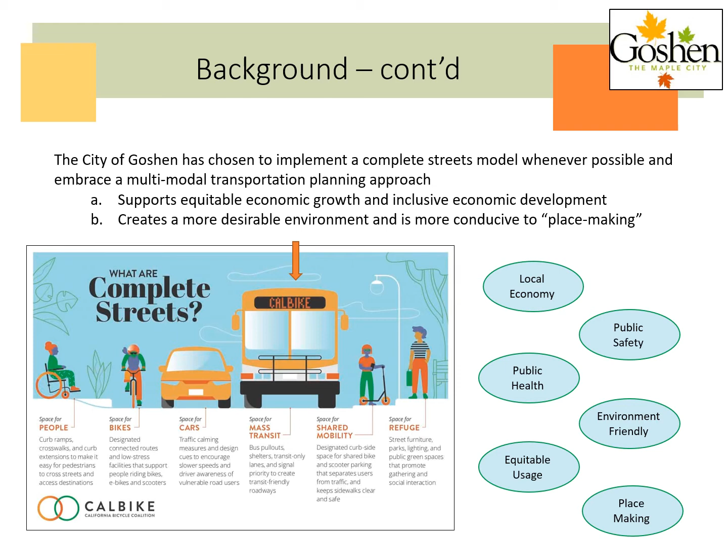A road diet offers a relatively low-cost application with high-value improvements, including enhanced safety, mobility, and access for all road users, and a complete streets environment to accommodate a variety of transportation types.

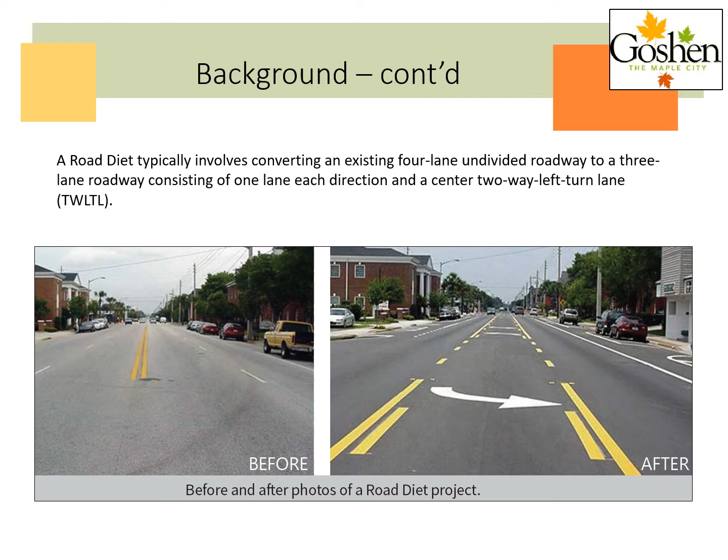According to the FHWA, additional benefits of a road diet installation may include an overall crash reduction of 19 to 47%, reduction of rear end and left turn crashes due to the dedicated left turn lane, reduced right angle crashes as side street motorists only cross 3 versus the previous 4 travel lanes, traffic calming and more consistent speeds, fewer lanes for pedestrians to cross, and an opportunity to install pedestrian refuge islands.

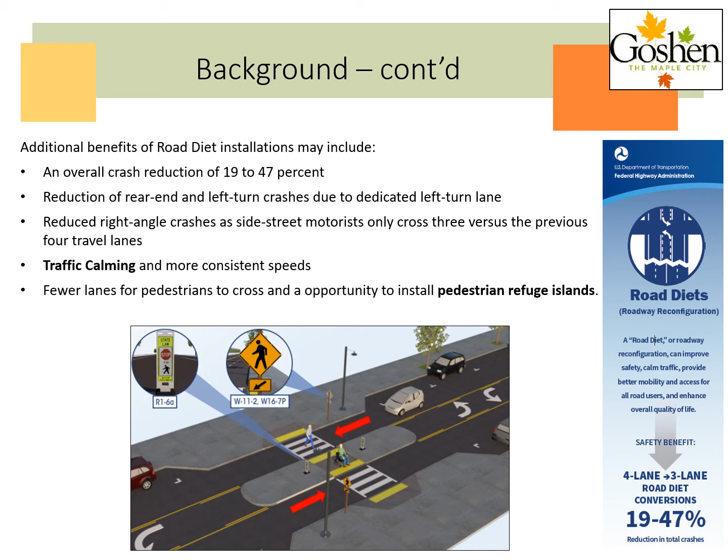So to this point, we've discussed the importance and priority that should be placed on the corridor cross-section and the complete streets approach by providing space for multiple modes of transportation. Now I'd like to discuss briefly several considerations for what that space could look like for bicycles within a given corridor. The first consideration is the choice of whether to locate the facility within the roadway limits or on a separated or off-road facility.

On-road facilities include shared lanes, bike lanes, and some cycle tracks. Off-road or separated facilities entail the use of a rigid barrier between the space for cyclists and the adjacent travel lanes, such as the numerous trails and multi-use paths we have around the city. While these types of facilities are preferred by many recreational or casual riders, off-road and separated facilities are more costly to construct and typically require significantly more space in the corridor. Often in downtown corridors, constraints from the limited ability to expand the right-of-way eliminate the possible use of off-road or separated facilities altogether.

As far as on-road facilities are concerned, most people are familiar with the concept of a bike lane. Bike lanes require little additional width in the corridor and are relatively inexpensive to implement. However, bike lanes tend to only cater to avid cyclists who are usually comfortable riding on most city streets within the flow of vehicular traffic.

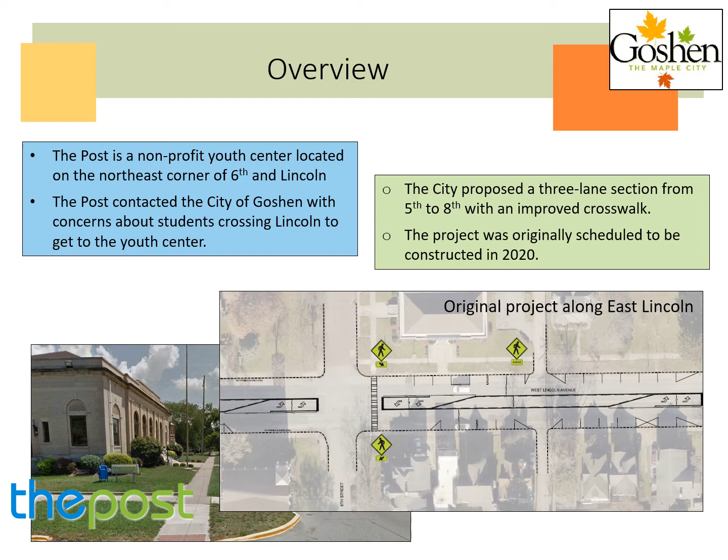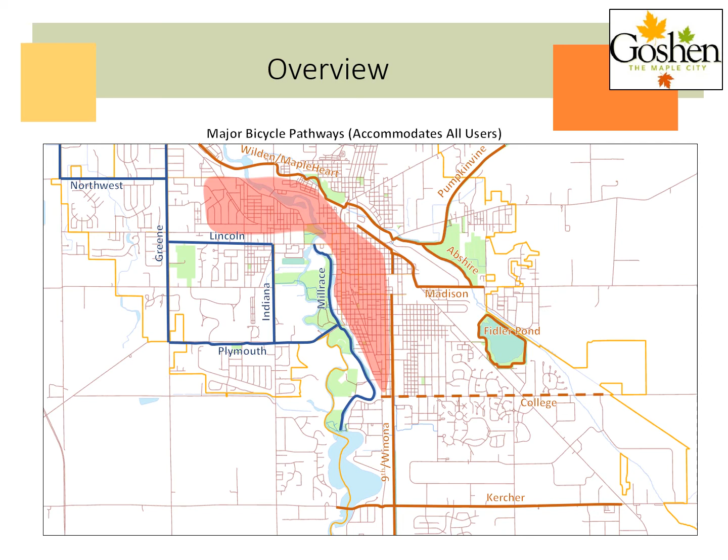The City of Goshen is currently working with MACOG to complete a transit expansion study to identify potential alternatives to modify and expand bus service. The purpose of this expansion is to serve additional trolley stops, provide better connectivity, and serve more residents, jobs, and services in the City of Goshen.

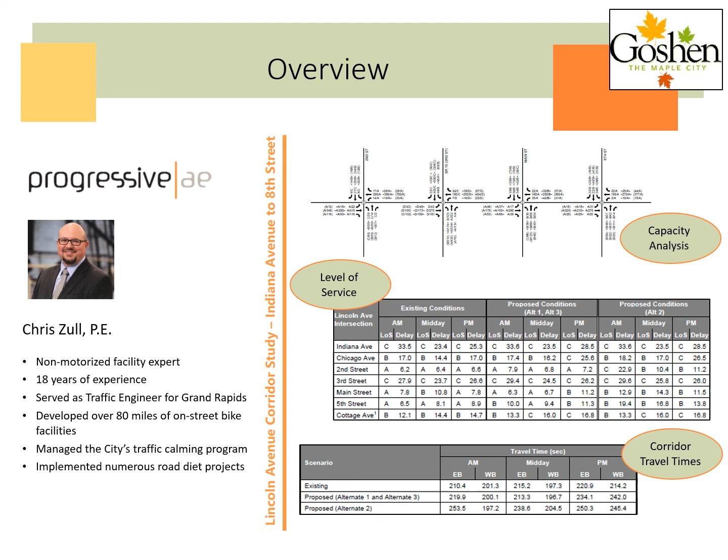Pavement markings will be the major component of this project and will be instrumental in providing guidance to both cyclists and vehicular traffic. The cycle track will be delineated with longitudinal white striping with a hatched adjacent area to provide separation from the adjacent travel lane.

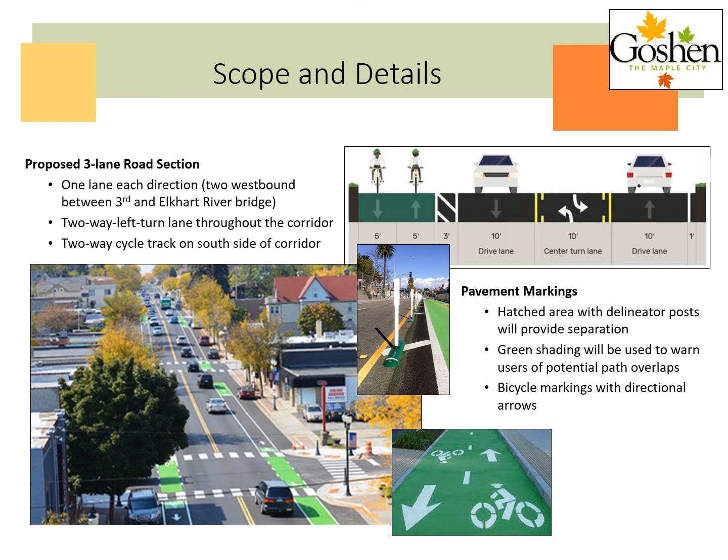As noted earlier, bicycle signal heads that are separate from both the traffic signals and the pedestrian signal heads will be an important component to the implementation of this project. Separate signal heads for cyclists makes it much easier to see the signal and much clearer as to which signal the cyclist should be adhering to.

The separate bicycle head also allows for slightly different timing than the main traffic signal, allowing a small head start for the cyclist to be programmed into each green phase. This allows the cyclist to enter the intersection prior to the vehicles being permitted to encroach and increases the cyclist's visibility, primarily to vehicles attempting to make a right turn.

The implementation of the cycle track and the bicycle signal heads will require a vehicular left turn lane at every intersection. This allows for a protected left turn phase for the vehicles while the cyclists are stopped, and prevents the path overlap that would exist with permissive left turn phasing.

A cyclist traveling along the cycle track and desiring to cross the corridor will proceed to the green bike box during the green phase for the Lincoln Corridor. The cyclist then waits there for the end of the green phase and for the subsequent green phase along the intersecting corridor. At that time, the cyclist would proceed across the corridor with the vehicular traffic along the intersecting roadway.

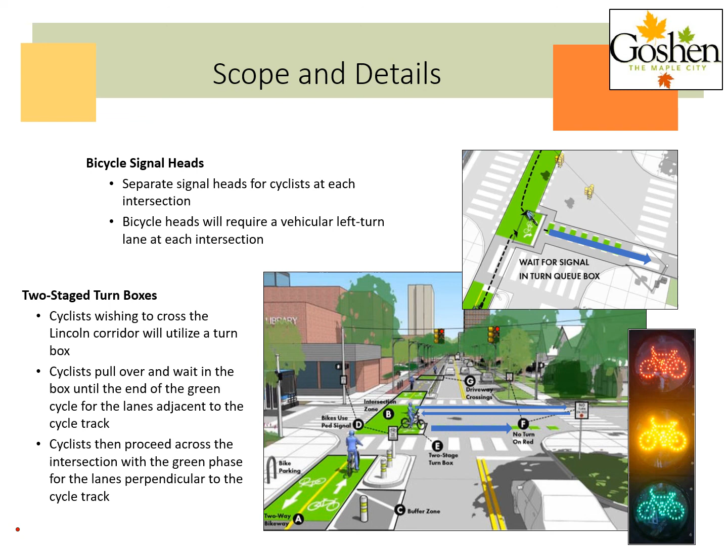The last item I would like to cover about this project is the remainder of the project development process. The engineering department has decided to go with a phased construction approach to this project. The reason for this is twofold. First, while a road diet is relatively inexpensive compared to most projects the city tackles, the ability to phase a project allows it to fit much more easily into the budgetary constraints.

Secondly, the engineering staff understands that a two-way cycle track will be a new concept to many community members, and constructing a smaller portion on a selected portion of roadway will allow users to become more familiar with the concept while still adding utility to the corridor.

The selected section for Phase 1 will be from Indiana to roughly the Elkhart River Bridge. This completes the connection between the Indiana Avenue multi-use path and the Millrace Trail. Phase 1 is preliminarily estimated to cost between $150,000 and $200,000. Phase 1 is scheduled to be constructed this year, with project bidding expected in early July. Construction is expected to be complete by early October. The exact schedule for subsequent phases has not yet been determined, but they will not be completed this year.